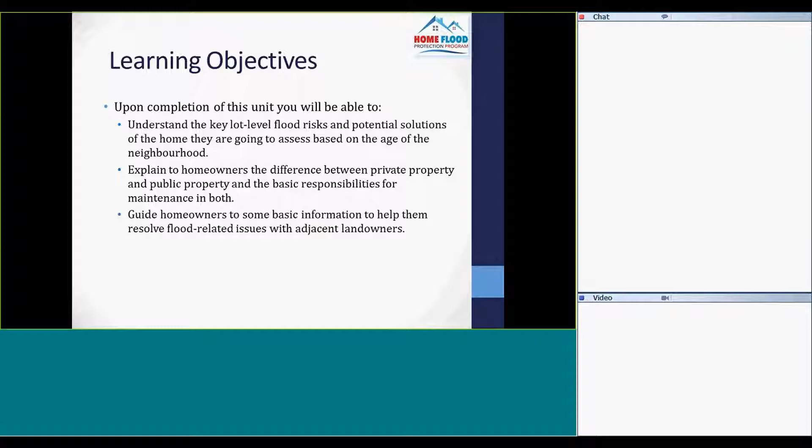So some things to think about. In your online material, you have been provided information about major storm events that have helped shape engineering and planning practices, what's changed over the years related to addressing stormwater management and flood prevention, and why it's important to help private property owners assess their risk when it comes to flood prevention.

So as water evaporates off of hard surfaces, that increases the amount of energy that is transferred into the atmosphere, and it influences how dramatic the storms are becoming and the frequency of those as well.

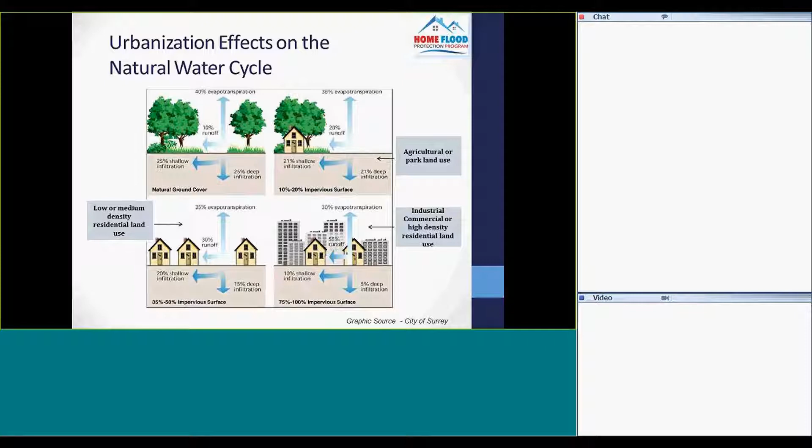In your online material, we've given you a lot of detail on 3 major storm events. I don't want to review them in great detail here, except to really focus on the implications that each of these events had on communities.

In the case of Hurricane Hazel back in 1954, substantial and significant flooding occurred in the Toronto area, which influenced how flood prevention was managed and handled. There was a more coordinated effort between conservation authorities and municipalities to manage where buildings were placed and how watercourses were managed in terms of the amount of runoff that they were being made to handle.

In the case of the Walkerton tragedy, which happened in 2000, though this was primarily a drinking water tragedy, in other words, people consumed tainted and contaminated drinking water, there were 93 recommendations that were presented by the O'Connor Commission, of which several related to source water protection.

And that, of course, focuses in on the rainfall that's coming down from the sky and where it ends up. Certainly, in the multi-barrier approach, which was presented as part of the Commission's results, source water protection was the beginning. That was the start of the multi-barrier approach. Included within that multi-barrier approach was drinking water treatment.

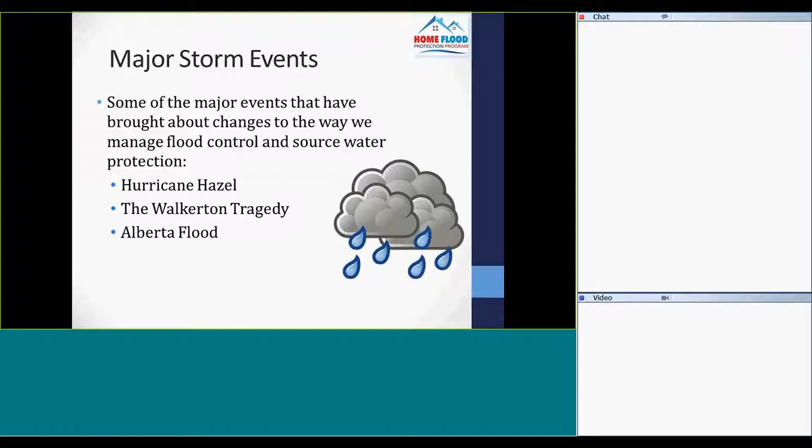But again, those three events: if we wanted to categorize the Hurricane Hazel event, it really focused on preventing floods. Walkerton was really around source water protection, and the Alberta flood was more related to climate change. So let's talk a little bit about the necessity of managing stormwater runoff and the amount that is handled.

So I just have to pause for a moment. Hello, Michael, it's Grant here. Can you just mute your microphone for a second?

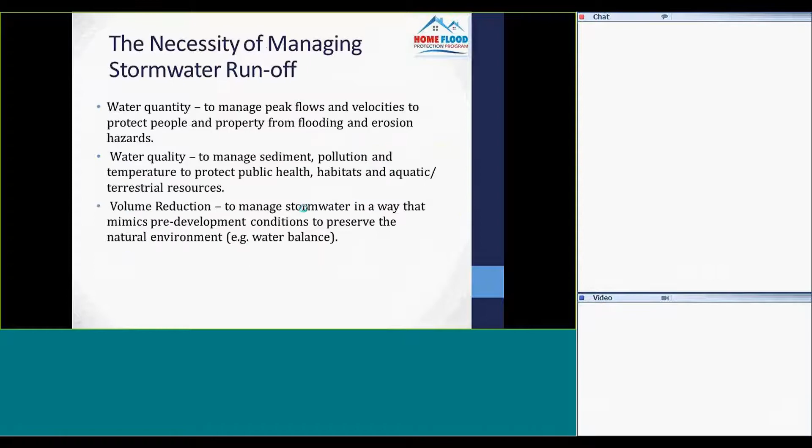I want to go in a slightly different direction, just to provide you with a quick overview of the various parties that are responsible and involved in flood prevention and stormwater management. Orders of government. The Canadian Constitution is the source of government authority in Canada. It grants federal and provincial governments certain powers to regulate various issues and areas. Not surprisingly, more than one government level has authority related to flood management and stormwater management. I'm going to talk about provincial, municipal, conservation authorities, and of course the private property owner and some of the

responsibilities there. At a provincial level, there is significant responsibility related to the approvals of sewage works under the Ontario Water Resources Act. Within the context of the Water Resources Act, sewage includes both sanitary sewage as well as stormwater itself. The provinces are permitted to delegate some of their authority to municipalities and conservation authorities, and we'll talk a little bit about that in a second. But essentially, it's the province that has the overall responsibility for approvals for these types of facilities.

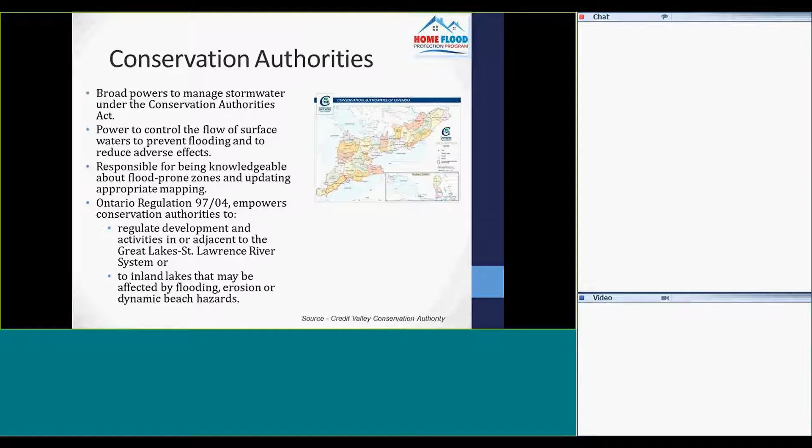Conservation authorities are a very special case to Ontario. They were generally enacted in the late 40s and early 50s, particularly came to the forefront after Hurricane Hazel, and essentially focus on the prevention of flooding. They are overall responsible for knowing and identifying where flood-prone zones are and the various flood zone mapping that's required to ensure safety of public and private property. Ontario Regulation 97/04 also provides them authority to regulate development activities adjacent to water bodies in the Great Lakes and St. Lawrence River system, as well as inland lakes that might be affected by flooding and erosion.

And finally, the last stakeholder in this circle of responsibility when it comes to flood prevention is the private property owner. Even with various levels of government ensuring that there are regulations and standards associated with stormwater management and flood prevention, the private property owner also has a responsibility on their own property.

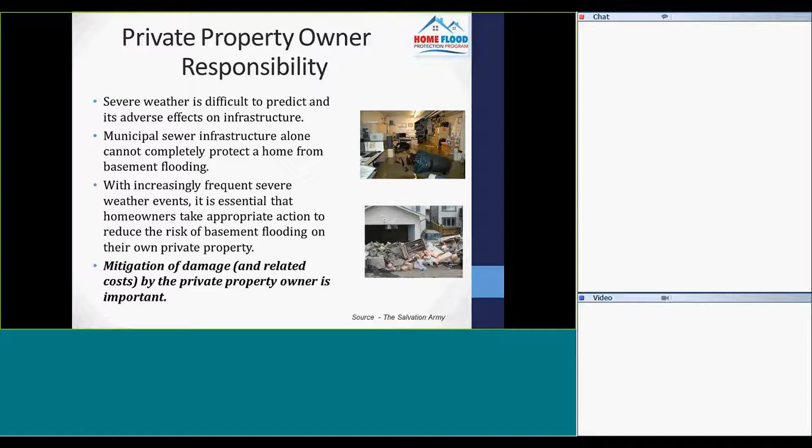Though efforts are made by various levels of government to ensure that runoff is handled and managed appropriately, there still are unforeseen circumstances that the private property owner needs to be aware of and to prepare for. As there are more frequent severe weather events, homeowners need to identify areas of flood risk around their property and actually mitigate that risk. It's not simply good enough to blame it on certain levels of government or someone else. There is a certain responsibility there for them as well.

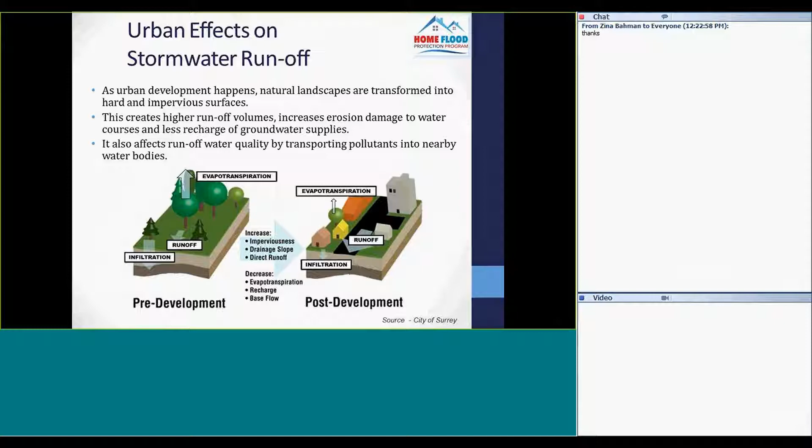So up to the 1980s, stormwater management was really focused on flood prevention. In between the 1980s up into 2000, there was a lot of focus on water quality improvements. In other words, trying to extract or reduce the amount of pollutants that are ending up in water courses. And after about 2000, there was much more dialogue around climate adaptation and ways to try and mimic the natural water cycle and really try and capture the rain that's hitting the ground at the source or at the lot level.

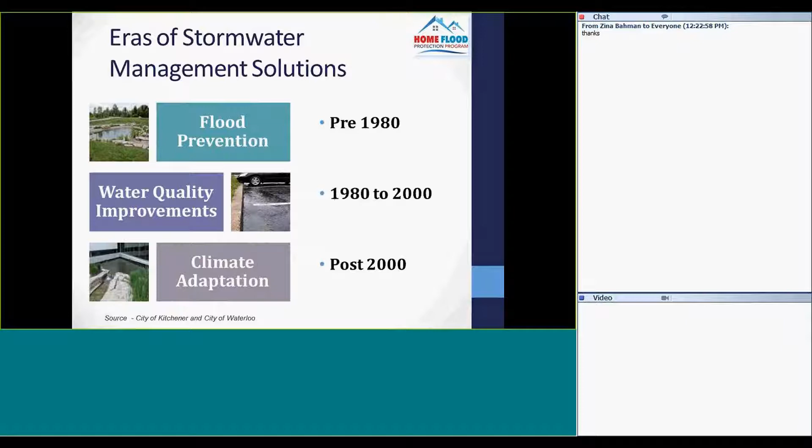After about 1980, there was much more emphasis placed on separating flows. In other words, taking the rainwater or stormwater and separating them into different drainage systems, capturing minor storms, say within small ditches or in the road allowance between the curbs, and directing them away from the development or property. And major storms are handled in different ways with larger facilities such as stormwater ponds or larger drainage ditches.

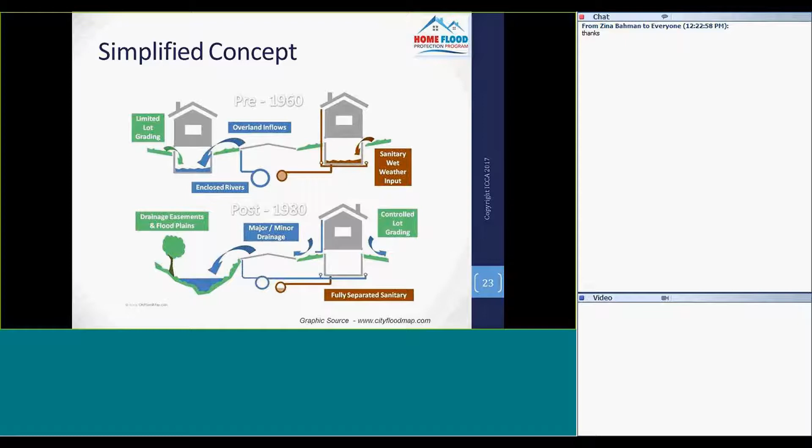So let's move on and talk a little bit about overland flooding. Again, overland flooding occurs when the capacity of municipal storm systems or combined sewer systems is exceeded. So they're designed for a certain depth of rain, a certain storm event, and the pipes and the systems cannot be designed necessarily for the maximum event that is possible. They're designed for the most realistic or frequent event that would occur, and in that case, it would be something like a 1 in 5 or 1 in 25 year event.

So municipalities, though they are able to manage rainwater and stormwater, they also compensate for this inability, or well, it just would be too costly for them to do it, with ditches and swales, ways to direct additional flows away from properties. And even in these circumstances, this can cause flooding in and around private properties. If these overland flow routes become overtopped, then this water would likely end up in people's basements.

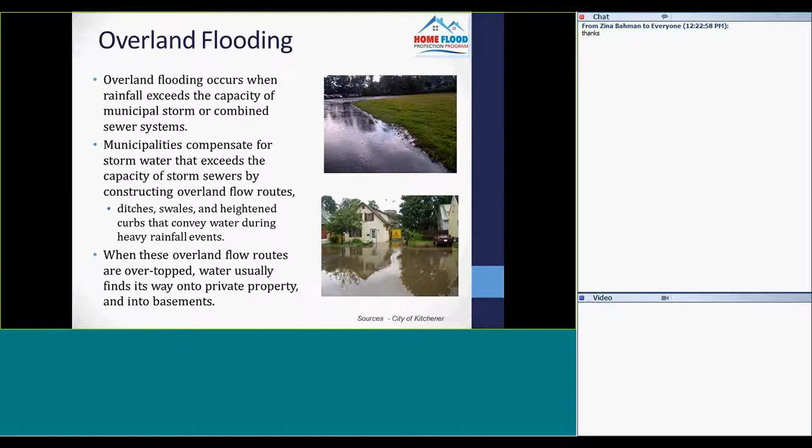So what's the difference between wastewater and stormwater? I'm sure a lot of you probably already know this, but just to be clear, wastewater is different from stormwater in that it's generated through the pipes from private properties, and they're directed to a centralized wastewater treatment plant. And what I'm talking about here is again, municipalities or urban centers which have centralized plants. If you're living out in the country, that's usually a different situation. You'll have a septic tank, but in the context of this course, wastewater is screened, the solids are removed, and the remaining water is disinfected and discharged to a river or a lake.

During rainstorms, e.g. wet weather, and you may have seen that term on a previous slide, wet weather conditions can cause stormwater to enter the sanitary pipe network or the wastewater pipe network, and this may overload the system, and again causes sewer backups and sewage potentially to bypass the treatment plant into the waterway. This occurred actually in the 2004 flood in Peterborough, where the system was so inundated with stormwater, it caused wastewater simply to go right through the treatment plant because there were such huge volumes of sewage and water being passed through pipes and basically overtopped the wastewater system.

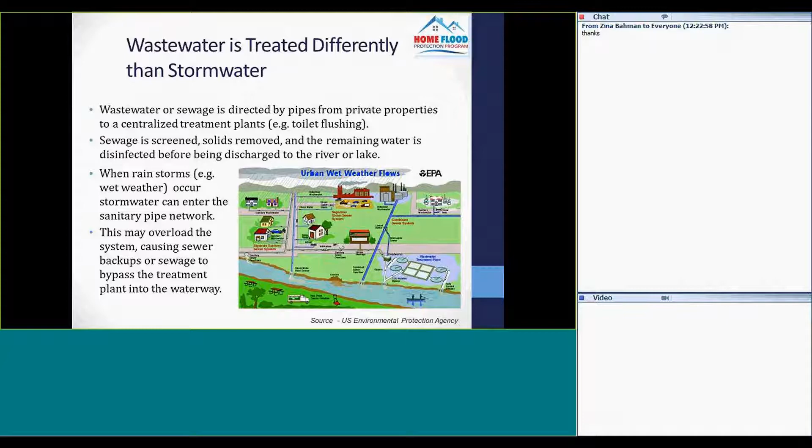So sewer backup is again different from overland flood conditions. A sewer backup is caused in conditions where stormwater has entered the sanitary system, has caused potentially surcharging of the pipe, which essentially means it turns from a gravity-fed system into a pressurized system, where the sewage is actually pushed up through the pipes that are underground and into private property pipes, or up into floor drains or toilets or sinks that can cause sewage to enter the basement.

Many cities have combined sanitary sewer systems. Again, they're legacies from the post-Second World War boom, and it was considered to be best practice at the time. But we realize that as our cities have grown, these systems have become overloaded and inefficient in a lot of respects. If we can separate stormwater away from the wastewater and keep that out of the sanitary sewer system, two things happen. One is we reduce the amount of sewage that has to be treated at a plant downstream, and two, we can reduce the risk associated with sewer backup or surcharging of these sewers. We'll talk a little bit more about this later, but there are incentive programs that municipalities use to encourage property owners to disconnect eavestrough downspouts and foundation drain connections to sanitary sewers.

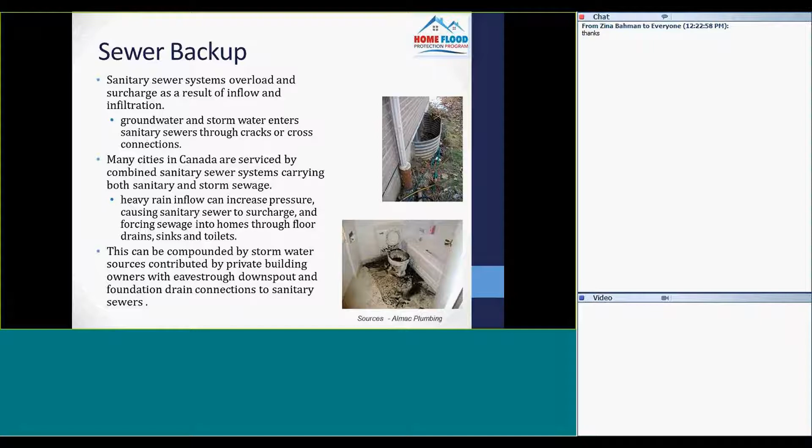So some of the engineering approaches, sorry about that. Some of the engineering approaches that municipalities across Canada have worked on to mitigate basement flooding include evaluating their sanitary and storm systems, separating these combined sanitary and storm sewers, and prioritizing where that work can take place. Typically, where there's the most basement flood concerns or drainage issue concerns, municipalities will focus in on that. Decreasing infiltration and inflow into the sewers, so essentially fixing either cracks in the pipe or the manholes, the underground system, which is infiltration, or reducing the inflow, which is really disconnecting those downspouts that might be connected from a house to the sanitary sewer itself.

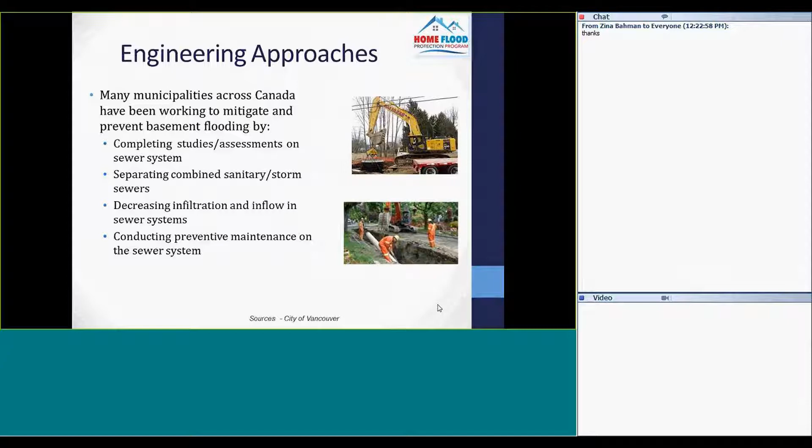And the last point is really conducting preventive maintenance, so making sure that we just don't put pipes in the ground and ignore them for 100 years; going out on a regular basis and making sure that they're cleaned and functioning properly is extremely important.

So this graphic summarizes some of the issues that I just finished discussing. So sources of inflow and infiltration, those are either, again, connections to the sanitary sewer system or breaks or cracks in the piping system itself. So if either one of those two things can be reduced or eliminated, it's going to reduce the amount of either groundwater or stormwater that will be getting into the sanitary sewer system, and thus reducing sewer backup risk. And so the house on the left is improperly connected, and the house on the right is better connected.

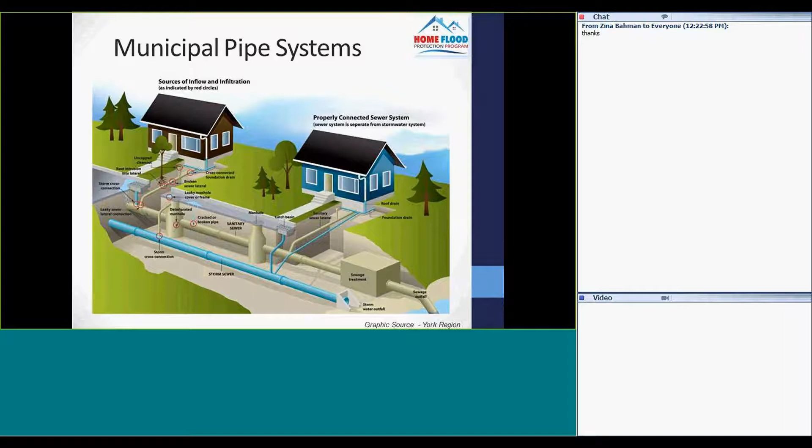Some of the other best management practices I'm just going to quickly highlight. We don't need to get too much into the nitty-gritty, but in other words, in order to try and address some of these issues of either controlling volume or improving the quality of the stormwater runoff, municipalities have implemented a series of best management practices that, again, started in the 1980s and either address runoff volumes or improvements to water quality.

Overall, the stormwater management treatment train, we'll talk a little bit about that, which really involves what we can do at a lot level, what we can do at a conveyance level, and what we can do at that discharge point before it reaches the waterway. An example is a stormwater management pond. Again, they're typically upstream of waterways. They try and either reduce the volume or improve the water quality of that runoff before it gets discharged.

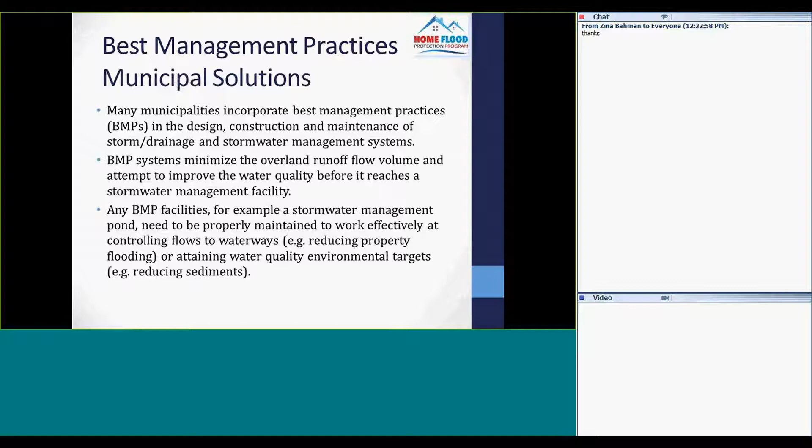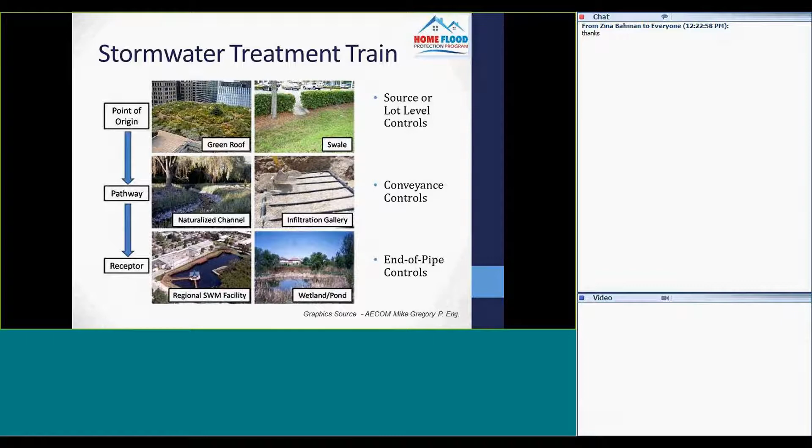And then finally, the end of pipe or discharge controls, which is the receptor. These are usually large facilities. As you get further and further away from the source of the rainfall, or the source of the runoff, the more and more complicated these systems become, and thus the expense goes up. So if runoff can be controlled effectively at source, it actually will help to improve downstream costs and maintenance issues.

You'll hear about low impact development, and this is an evolving and emerging trend, a more current stormwater best management practice, and focuses on trying to capture that runoff at source. A very good guide is the LID SWM, or in other words, Low Impact Development Stormwater Management Guide, which was developed by the Credit Valley Conservation and Toronto and Region Conservation Authorities. This will be referenced in your lessons coming up, I believe, in the next lesson on private property lot level control.

It's a great guide, and it gives you a lot of useful information about what LID is all about and some of the practices that are being considered and have been applied as part of the stormwater management treatment train approach. There's no doubt that LID has its drawbacks, as well as some of the positive things, such as trying to reduce stormwater runoff.

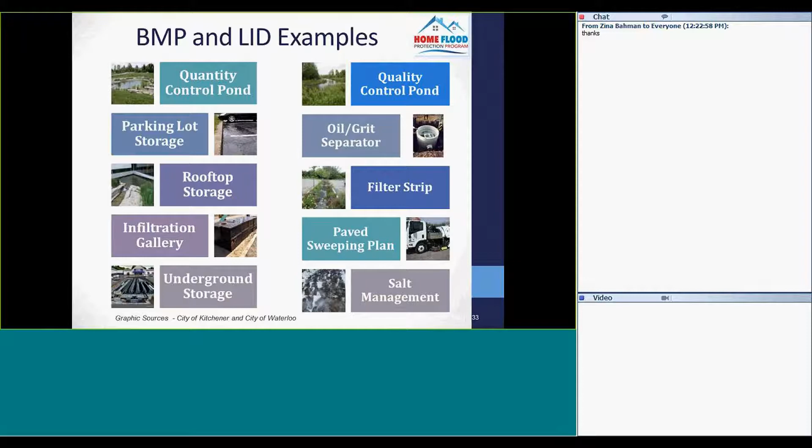So let's talk a little bit about education and incentives. As I mentioned, there are responsibilities for private property owners, and in a lot of ways, to try and reduce that risk to private property owners, sometimes you have to encourage them with incentives to get them to do the right thing. And this could involve just simply educating them about basement flood risks, but typically we need a little bit more than that. We need the property owners to take action.

So some of the social approaches, I'll say, are designed to increase public awareness around flood hazards. This program, the Home Flood Protection Program, is one example of that. And again, trying to get homeowners or private property owners to adopt certain practices. So looking around your property, understanding how the lot grading works. Do you have low spots in your property? Do you have water coming into your foundation? In other words, is the grading improperly set up?

A little bit more costly, but nonetheless important, are things like installation of backwater valves or installation of sump pumps and backups for sump pumps, disconnection programs of downspouts, and basically taking them apart and allowing the runoff to run across land. These are all examples where homeowners can take positive action, and municipalities are interested in trying to encourage them to take that action.

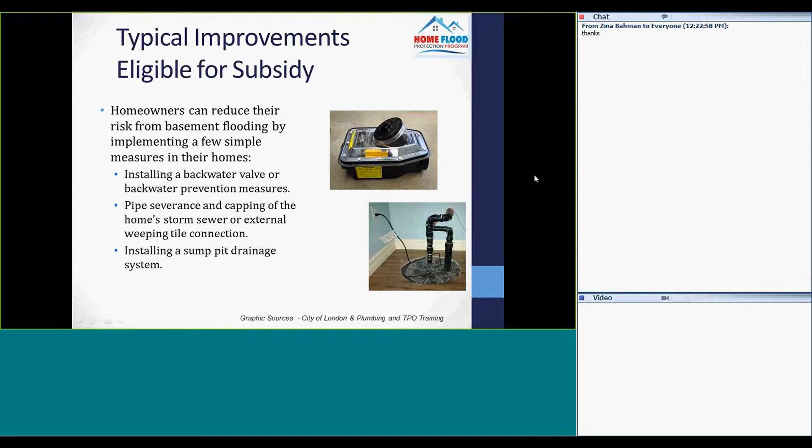So typical improvements, as I mentioned, are listed here. There's more in the online material that has been provided. But just in summary, some of the program rebates, again, are to try and encourage property owners. This doesn't obviously cover the entire cost to either do a disconnect or a replacement or other improvement. It is intended just to try and encourage property owners to take the right action.

So I'll give you a tangible example. When I was working at the City of Kitchener, we had a sump pump disconnect program where people actually had sump pumps and the piping connected directly into the sanitary sewer that ran out in front of their property on the street. We encouraged property owners to dig up and disconnect that connection and then reroute their sump pump discharge overland through a swale or out onto their front lawn.

We were only able to cover a certain portion of that cost, and we also had a waiting list. So we had a certain budget of, say, $50,000 or $100,000 that only allowed a certain number of properties to be done in any given year. So that's an example where municipalities have set aside money to try and get this problem resolved, but it certainly doesn't happen overnight.

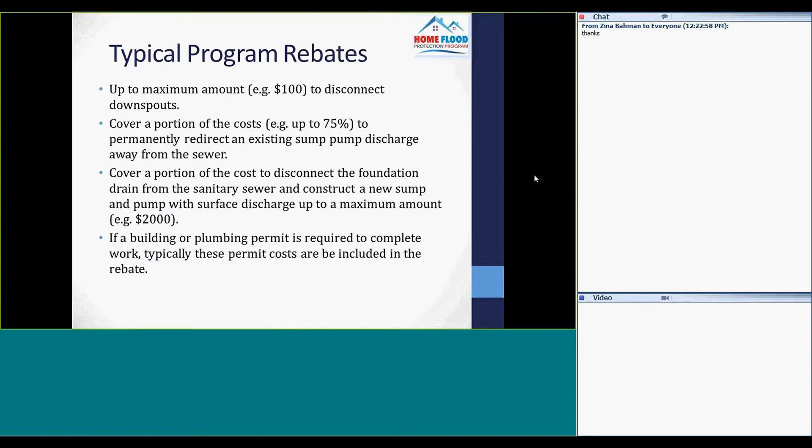Again, typically there's a certain completion date that's required. There's a certain limit on the financial contribution by the municipalities. Building permits would have to be obtained. If it's a plumbing issue, that's typically standard. And again, as I mentioned, in the case of Kitchener, we had a first come, first served basis where we only had a certain amount of money every year to allocate to it. Now, the city at that time implemented a stormwater utility which allowed the municipality to generate additional revenue to put towards more of these issues over a longer period of time.

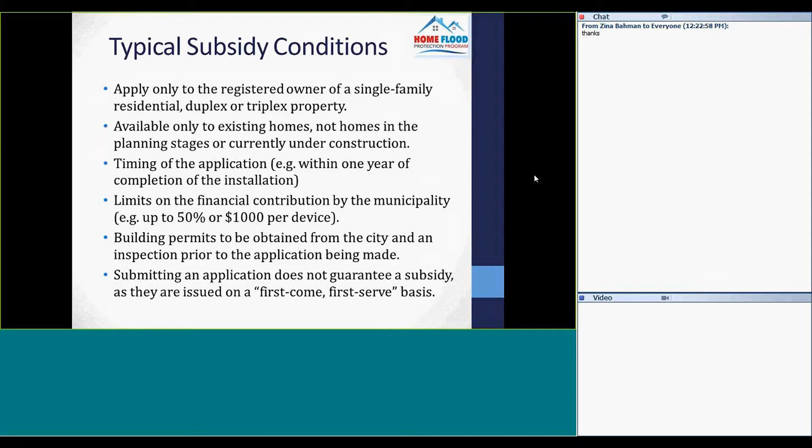So I'm going to summarize the presentation here. It's an evolving practice. The programs continue to evolve with time, but certainly municipalities have been spending a lot of their time looking for ways to reduce sewer backup and flooding within their communities. The science and the management techniques have changed, and there's more of a focus on the overall health of rivers and streams and fisheries. And again, it's not all about how fast we can get rid of the water in an urban environment, but really what the quality of that water is once it eventually gets discharged.

However, with more frequent heavy rainfall events due to climate change, there will be an additional burden placed on infrastructure, and there'll be an increased occurrence of damages because of sewer backup. And so there's a heightened sense of concern around looking for ways to either improve the urban infrastructure or reduce the amount of risk that private property owners face. Private property owners have an important role to mitigate that damage, and this is going to be part of your role as an assessor, to try and get those messages across, demonstrate the value, and try and eliminate that risk for private property owners.

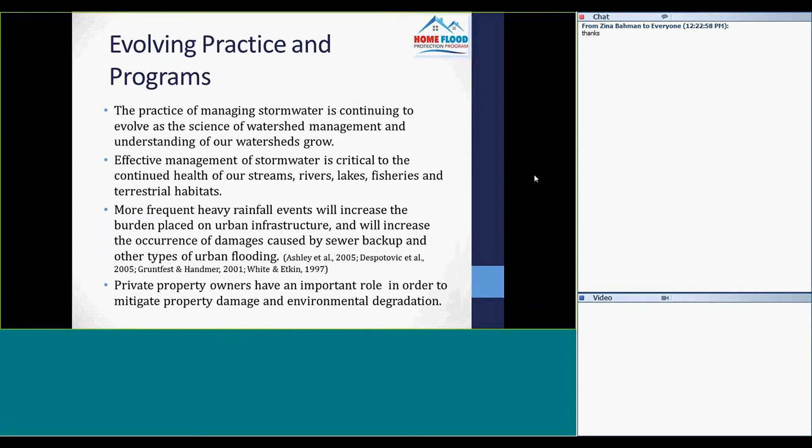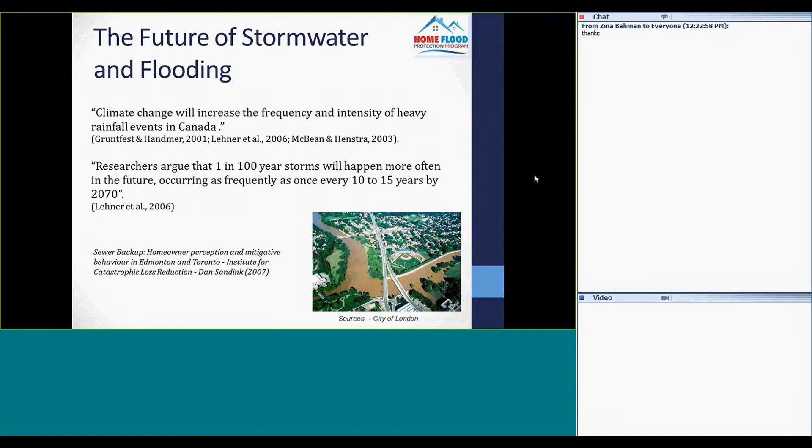So what's the future of stormwater and flooding? Well, a couple of quotes from some pretty smart people, not myself included. But again, as climate change increases, there's going to be more frequent and more intense storms, and you just have to think about this spring and how wet it has been, and how often thunderstorms have rolled by over the last little while. And certainly the time between major events is becoming shorter and shorter.

So in summary, thanks very much. This brings the presentation to a conclusion. I'd certainly be happy to try and address any questions that you may have.